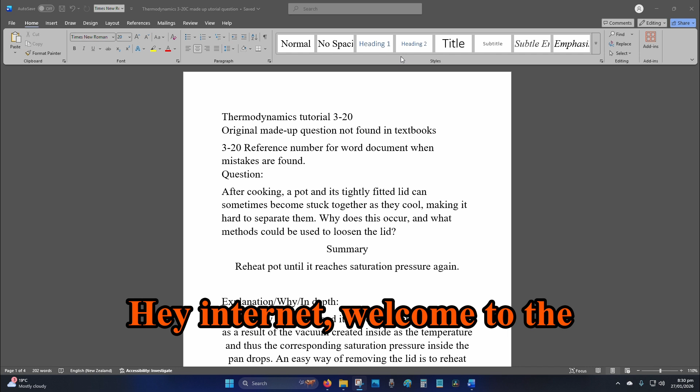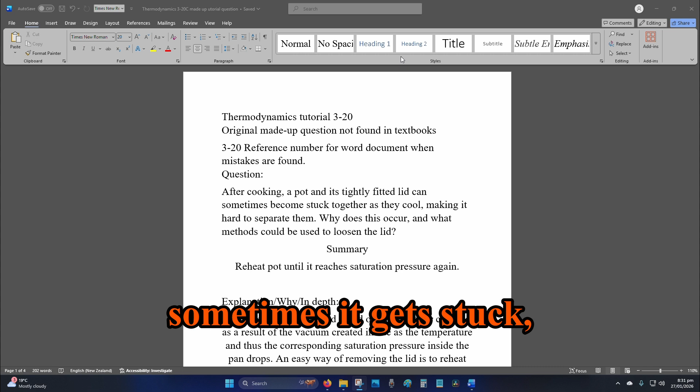When you're cooking with a pot and lid that is tightly fitted, sometimes it gets stuck, making it hard to separate. Why does this happen? And how do you loosen the lid?

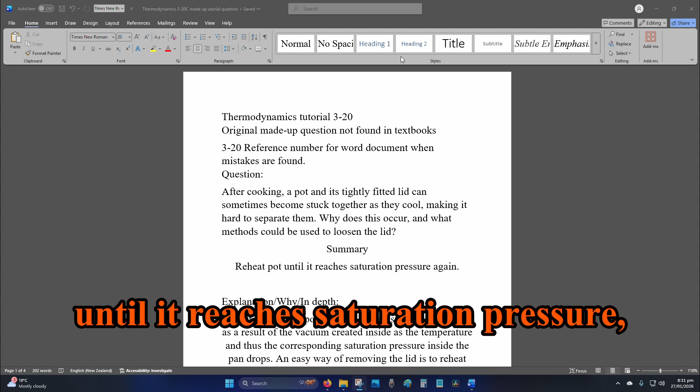Summary: the reason why it happens is because of the pressure difference. To fix this, you need to reheat your pot until it reaches saturation pressure, and then the pressure will equalize, and then you can lift your lid.

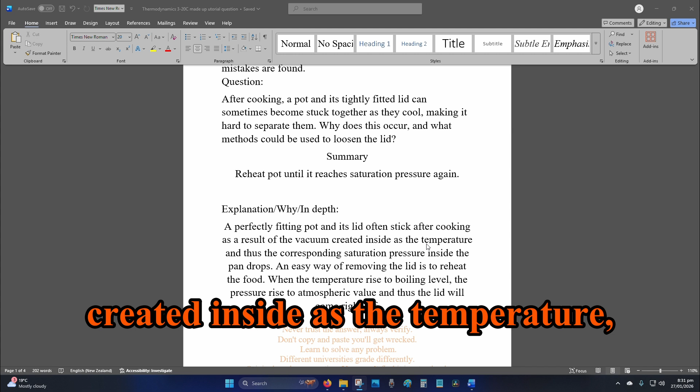A more in-depth explanation: a perfectly fitting pot and its lid often stick together after cooking as a result of the vacuum created inside as the temperature, and thus the corresponding saturation pressure inside the pan, drops.

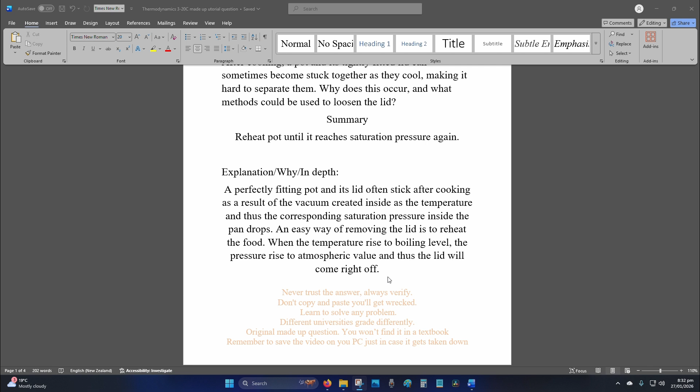An easy way of removing the lid is to reheat the food. When the temperature rises to boiling level, the pressure rises to atmospheric value, and thus the lid will come off. So once again, you want to equalize the pressure to remove the lid.